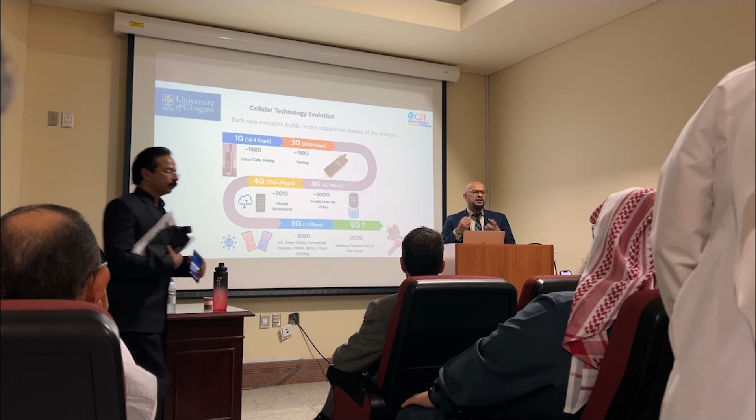I'm sure many of you were not born when 1G came. It was back in the 1980s. And every 10 years, we have a new generation of mobile communication coming, and each generation was better than the previous generation. And the real change happened when we had 5G, because we started talking about connecting an ecosystem. So up to 4G, we were talking only about mobile communication, mobile to mobile connection. But in 5G, we started talking about connecting everything by using IoT, your home appliances, so on and so forth.

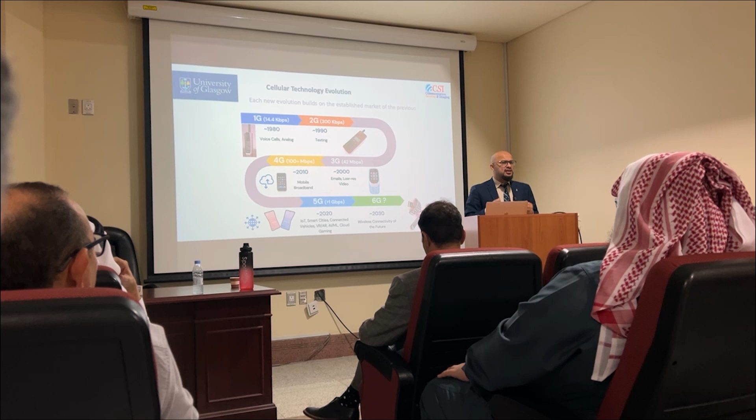And then 6G came. And the real feature for 6G is that up to 5G, you can do only communication by using the mobile generation. But with 6G, you can do both communication and sensing, which I will talk about in detail. But the question is, do we really need 6G? This is a big question, because I can watch movies, I can do anything by using even my 4G as well, and 5G can give me better speed. So I have to make the case that we really need 6G, and then I'll talk about technical aspects.

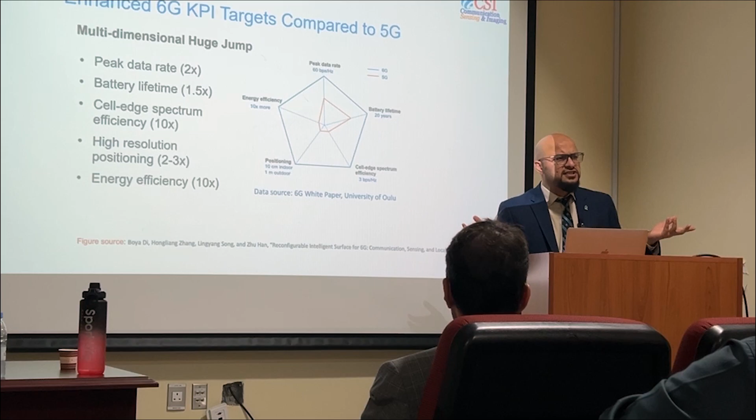So the number of mobile users is increasing day by day. Around 67% of the global population is using the internet, and an average user is spending 6 to 7 hours using mobile data, which is very big. So the demand is increasing. But this demand can be fulfilled by 5G as well, right? But I was in Mobile World Congress last year.

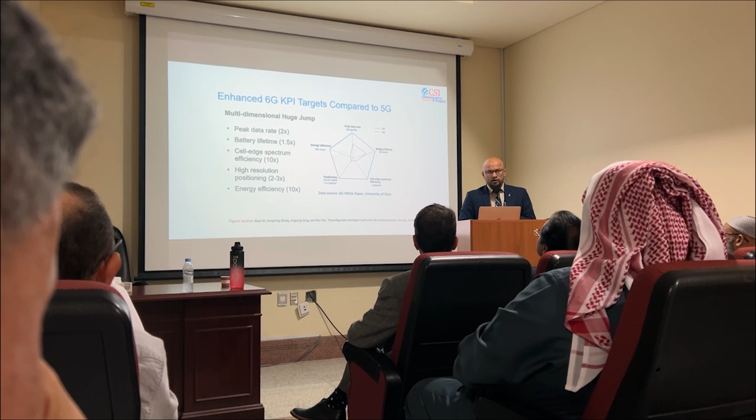So what happened is that for the first time in history since mobile technology's inception, the operators and vendors were not getting return on investment. Means they put money, so they want huge profit, but they were not getting it. Because the challenge is that, as I said, whatever 5G can do, 4G can do that as well, because there were not any use cases which explicitly need 5G, and money return comes from those use cases. So there was some flaw in designing mobile networks up to 5G. And what was the flaw?

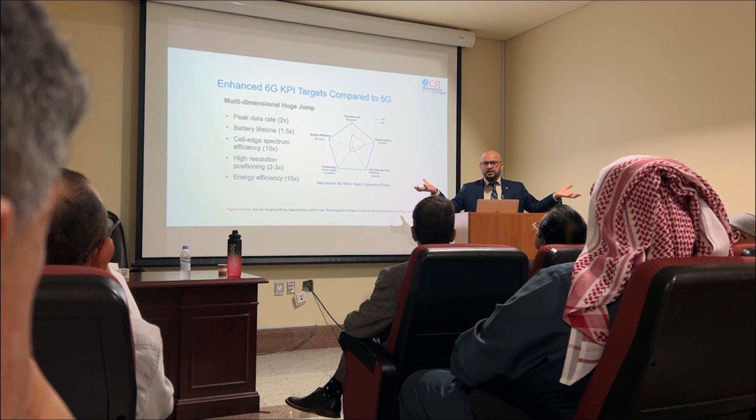That the researchers set up the KPIs, they make a network, and then there were no use cases outside, for example, for 5G. So we started thinking, let's go the other way around. Instead of setting KPIs for 6G, let's think of some use case first and then set up KPIs according to that. So we came up with a very interesting use case: how many senses do we humans have? Can somebody tell me?

Five. But people like Dr. Sami have six as well, but normal people have five senses. So up to now, we can transport 2.5 senses from point A to point B: hearing by using mobile phones, vision by doing video calls, and you have seen haptics by using robots, right? But we are unable to transport smell and taste.

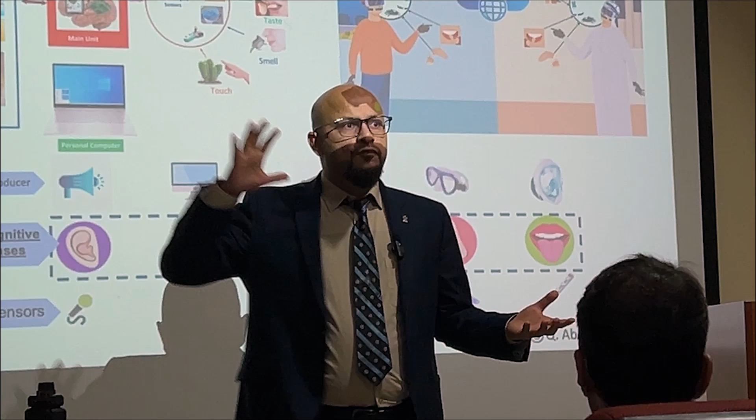So imagine if we teleport all five senses from point A to point B, then you can have a holograph with all five senses. For example, I can have a taste of any Saudi dish while sitting in Scotland, with the same aroma and the same environment. So that is teleportation of all five senses from point A to point B.

But this needs ultra low latency, ultra high throughput. For example, one square inch of hand needs around 10 gigabits per second of data, and imagine if it's a complete hand, how much data it needs. So this means that 5G cannot fulfill the stringent requirements for this use case. So we find something which needs 6G.

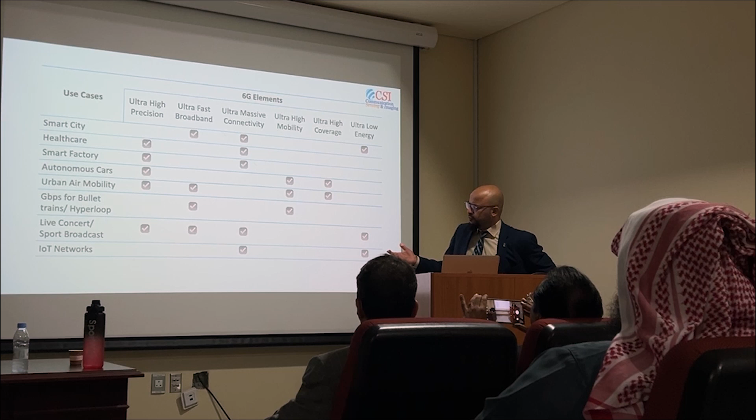But there are many other use cases for 6G available as well. And these are the elements of 6G which are under discussion. But one key feature for 6G is that it will be ubiquitous, that it can take decisions itself to enable various other use cases, including bullet trains and sports broadcast. FIFA is coming to KSA, so 6G will be very important to do this live broadcast.

So in our hub, we are working on technologies which can enable 6G. 6G will not be out until 2032, 2033, but we need to develop the technology. Now, use cases are set up, KPIs are set up, so work is being done on development. So we work on developing antennas. No wireless is possible without antennas. Antennas are the ears and eyes of any wireless communication system. We work on intelligent reflective surfaces, we work on quantum communication, but the focus of this talk will be on this.

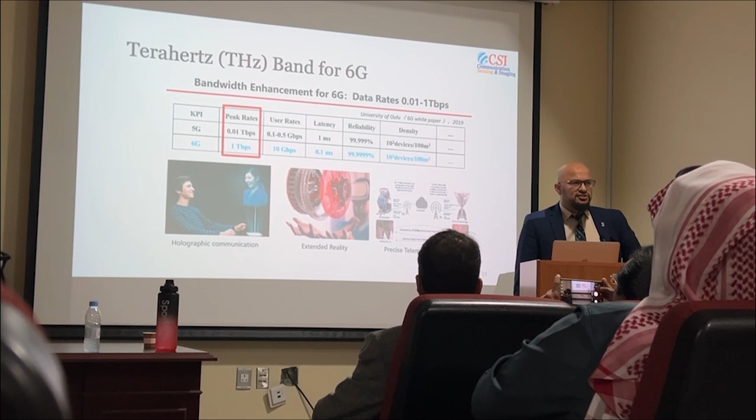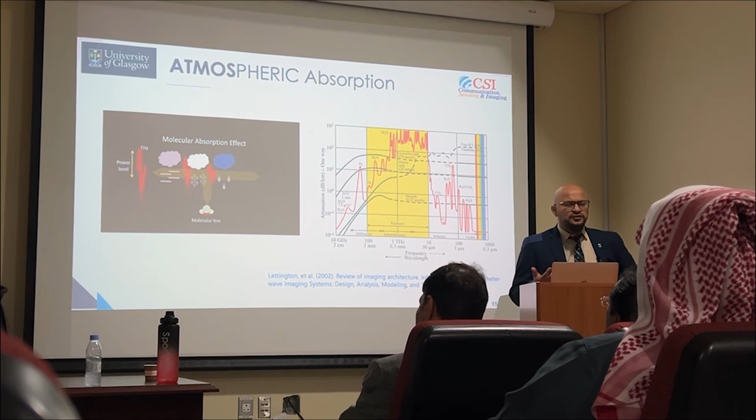So the prospective band to be used for 6G will be terahertz, because it can provide us features like a peak data rate up to 1 terabit per second and latency less than 0.1 millisecond. But it comes with challenges. Terahertz has challenges around atmospheric absorption, in that it is very sensitive to moisture content.

Second is skin depth. As you move higher in frequencies, what happens is that skin depth decreases. So it means we cannot use conventional materials for 6G. We need some new 2D materials which can enable 6G. So in our hub, we are trying to look at some novel 2D materials, which include graphene and carbon nanotubes.

Just listen to me, it's okay, don't worry about that. Yes, yes. No, I'll keep you entertained, you don't need slides. So, one sense then. You need two senses at least. But I can make it happen with one sense as well.

So 2D materials like graphene and carbon nanotubes, we are using those materials to make antennas. And they have a special phenomenon called the surface plasmon phenomenon. Focus here, forget about the projector. So they have the surface plasmon phenomenon, which can help to overcome the challenges posed by terahertz.

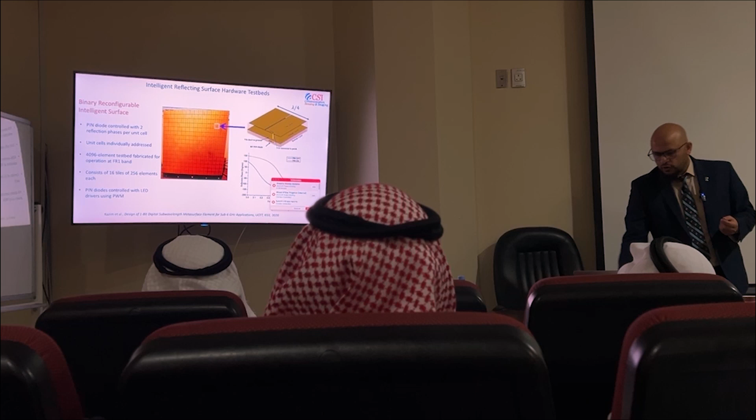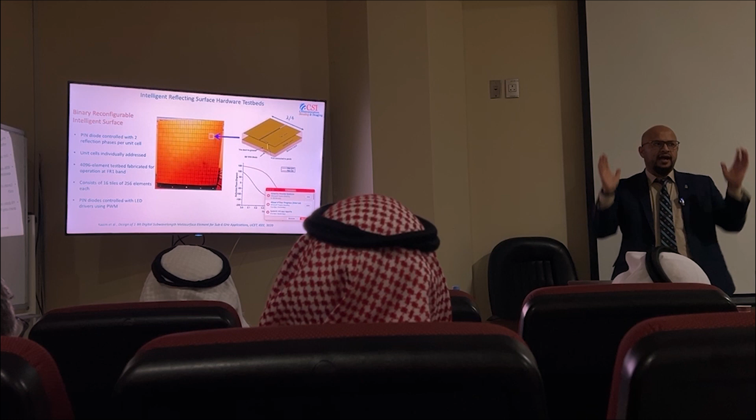So this is our first test bed. Basically, this is a 1-bit intelligent reflective surface. When I say 1 bit, it means that it can change the phase of the incoming wave by 180 degrees. So how did we make it? We made a meta cell, which is on the right top, and once it's designed, you replicate it to make a tile. The reason to make tiles is flexibility: you put tiles the way you like, like you put tiles on the floor. So you can make any shape, cascaded, parallel, hybrid, small, big, whatever you want.

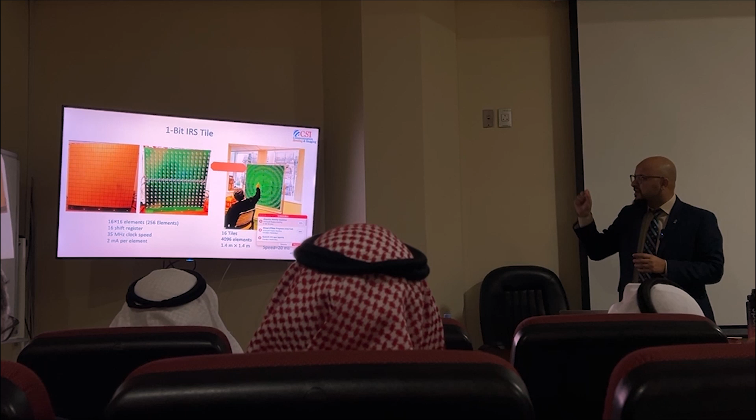And this is basically what this surface is doing. It is switching, changing the phase of the incoming signal. How is this achieved? By using a switching element, a PIN diode in this case. This first test bed has 4096 elements. It is one of the largest test beds available globally, and it can provide a very high gain. But one thing, students, you need to remember: the power consumption for this whole test bed was 15 watts, and I'll ask you later on.

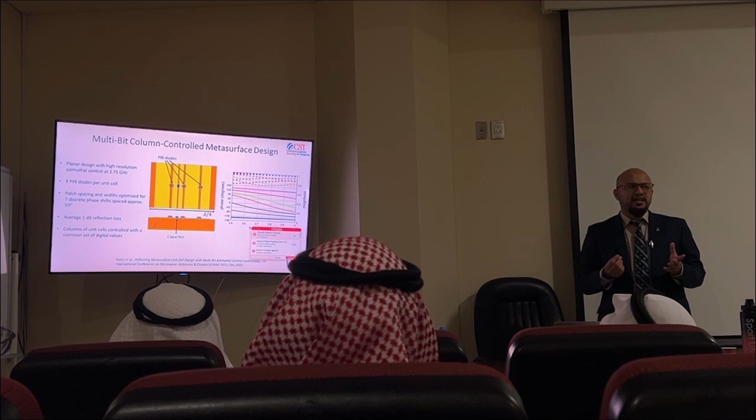The second test bed we made was a 3-bit metasurface or RIS design. By 3-bit I mean 2 raised to the power 3 states, in total 8 states. So you can change the phase of the incoming signal in 45-degree steps: 45, minus 45, 90, minus 90, and so on. The process was similar. We made a single meta cell, then a tile, and you can see in this figure we had 6 tiles.

One second, what is this? There was something coming. So we had 6 tiles. I think it should be fine.

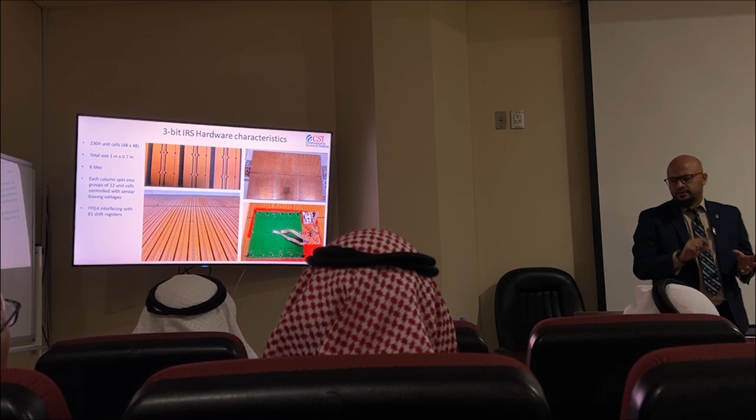We were controlling this architecture using an FPGA, because the FPGA is the brain which gives these configurations to turn on or turn off certain elements. This is the actual hardware we have developed. Now we want to test whether it serves the purpose, because one of the main benefits of these surfaces is to provide gain and reduce losses. So we took it to an anechoic chamber, a shielded environment with no external reflections.

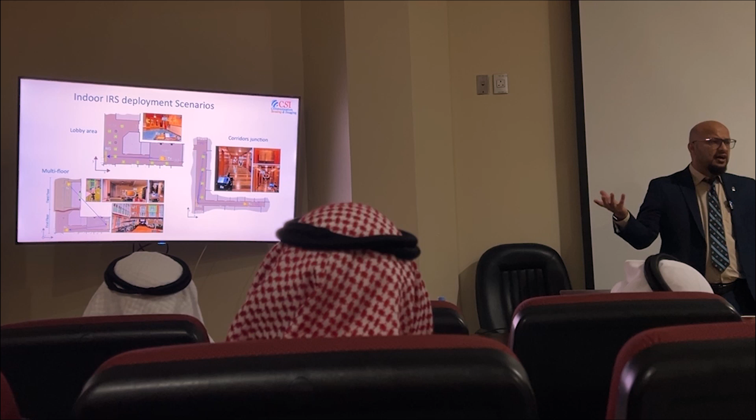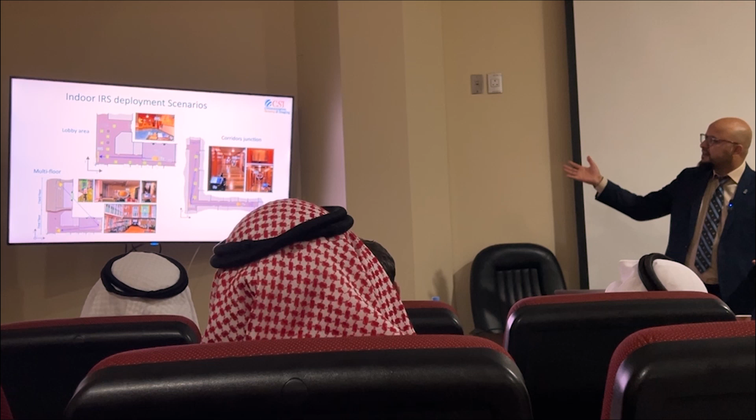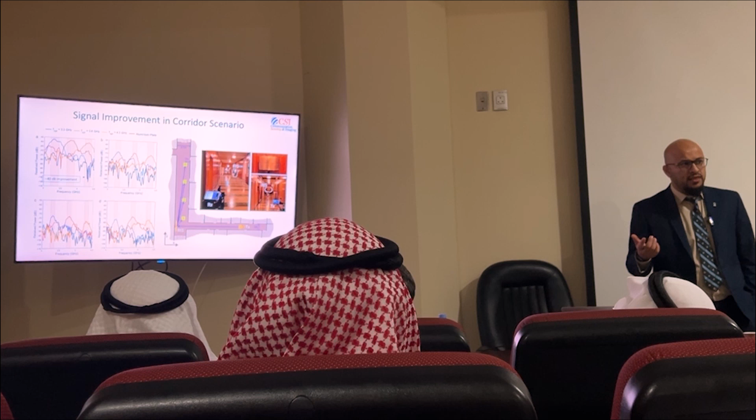We designed an experiment for various indoor environments, including lobby, multi-floor, and corridor junction, where the transmitter was placed at one location and the receiver at 4 different locations where they cannot see each other. Then we placed the RIS in the middle. Without the RIS, there would be no signal. The results were very encouraging, showing a gain of 20 dB on average. Improvement in power? Yes, improvement in received signal by 20 dB, which is very high.

We were working with British Telecom, one of the largest telecom operators, and we got super excited. We went to them: we did a breakthrough, look, it's working. And they asked us, what is the total power consumption? Can somebody tell me what it was? 15 watts. Yes. They said this is very high, because if you want to make a big system, 15 watts is very high, and replicating it costs them millions. So they did not want to invest a single dollar.

Due to switching the element. Heat is one thing, but power consumption is another thing. So they said to us, in cold weather you can use it for heating homes, yeah, but you have to provide the energy. So then as researchers, we got demotivated. What should we do? Because our years of service got wasted. But then as a researcher, you shouldn't get disappointed.

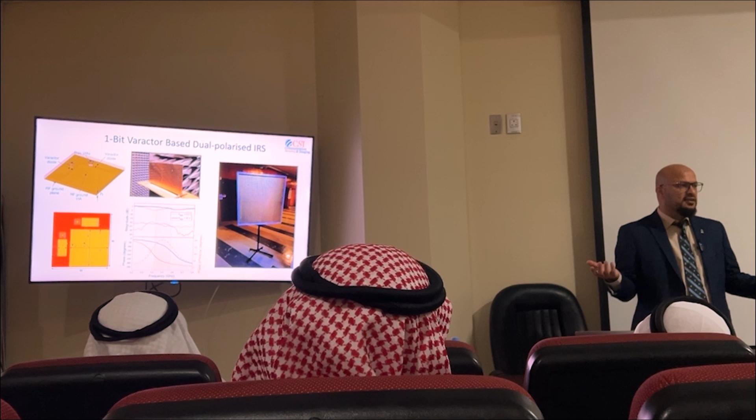So we started thinking again, and we came to know that the main power consumption was coming from those PIN diodes, the switching elements. I'm sure we all have studied varactor diodes. The beauty of varactor diodes is that they work in reverse bias, meaning they do not consume any power or current. So we made a new design where we use varactor diodes for switching instead of PIN diodes. Ultimately, power consumption reduced from watts to a few milliwatts.

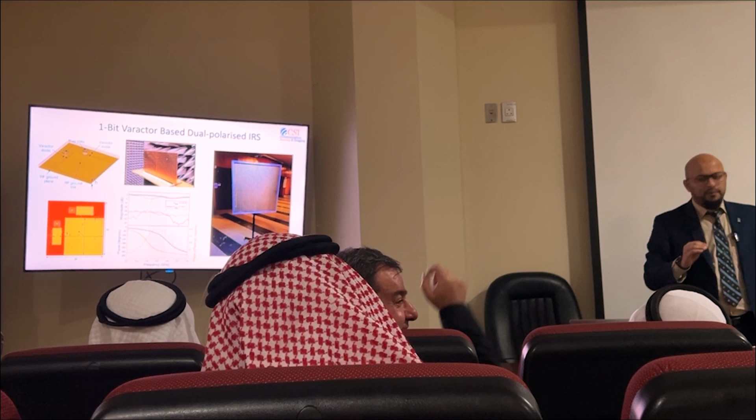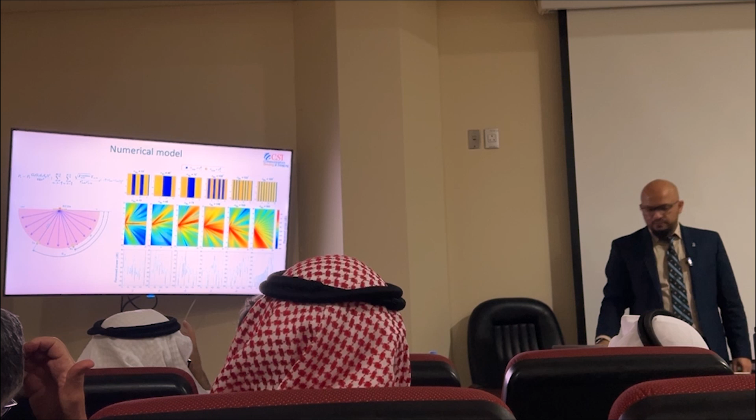So this was one thing we got by using varactor diodes, and the second thing was we were able to steer the beam, because with varactor diodes, if you change the voltage, you can change the capacitance. If you change that, you can switch the beams. So we showed that in addition to sending beams at a fixed angle, you can do beam sweeping or beamforming as well. We were able to do from 0 to 180 degrees, but this was in simulation. So we went to the University of Southern California to use their channel sounder to do actual measurements, and you can see there is close agreement between simulation and measurement.

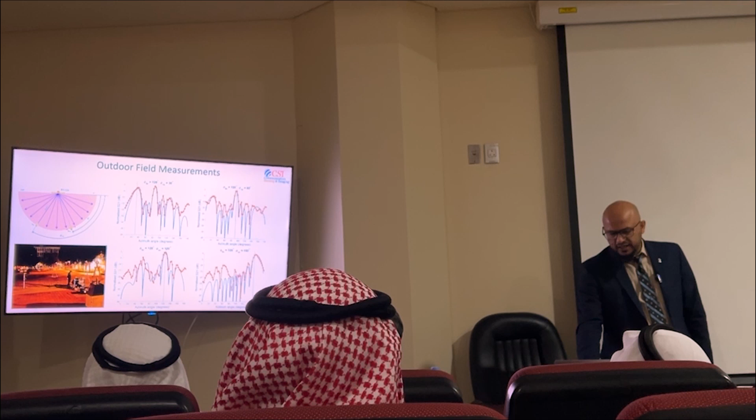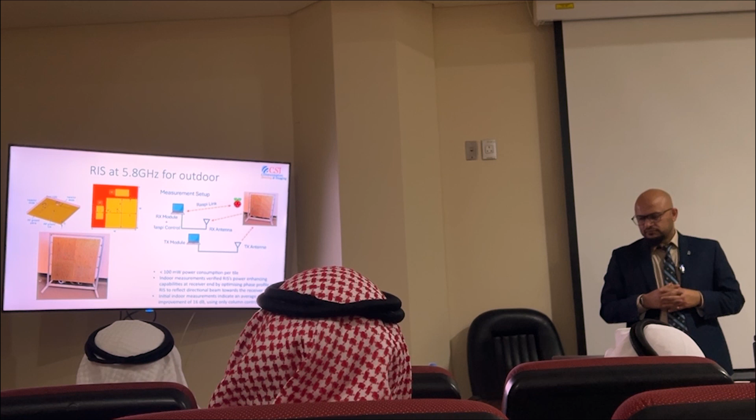Then we worked a lot with our defense department as well, where the idea was to make these reconfigurable surfaces at 5.8 gigahertz for outdoor environments, where we tried to make them flexible. This was a new design being developed at 5.8 gigahertz. I cannot tell more because it's related to defense.

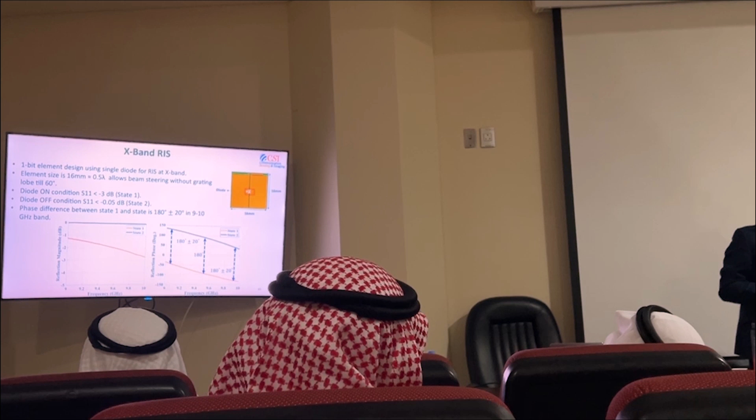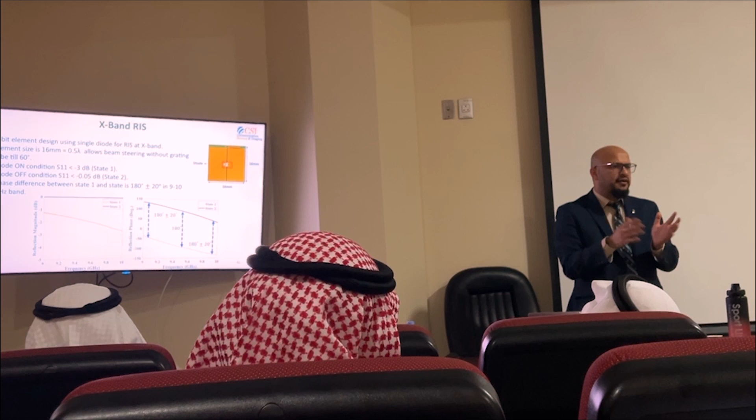And if you remember, I told you about a very unique feature of 6G, which is joint sensing and communication, doing both sensing and communication. So we designed these RIS surfaces at X band. X band is basically 8 to 12 gigahertz, which is used by some radars. So we were using those radars for sensing and for communication as well. But as I told you, if there is a non-line-of-sight scenario, you cannot do communication. So we needed to make these X band RIS, where the process was similar.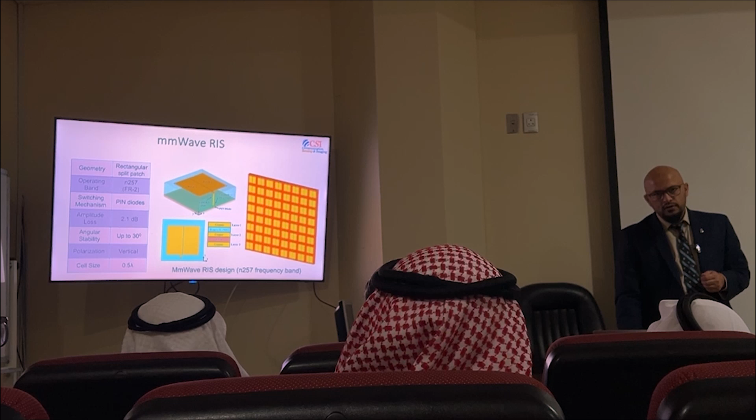So you sweep the phase shifts, and do you get feedback from the receiver that this is the best phase shift? So what we do is we have a PSO algorithm running which scans the beam continuously and looks at the maximum SNR. Wherever we are getting maximum SNR for the receiver, we transmit the signal in that direction. No, there is no feedback from the receiver. It is scanning by finding a location where we have maximum SNR going out. So we are not getting that.

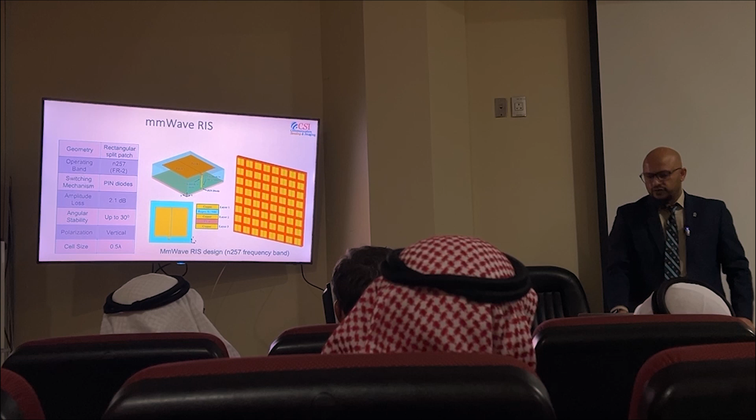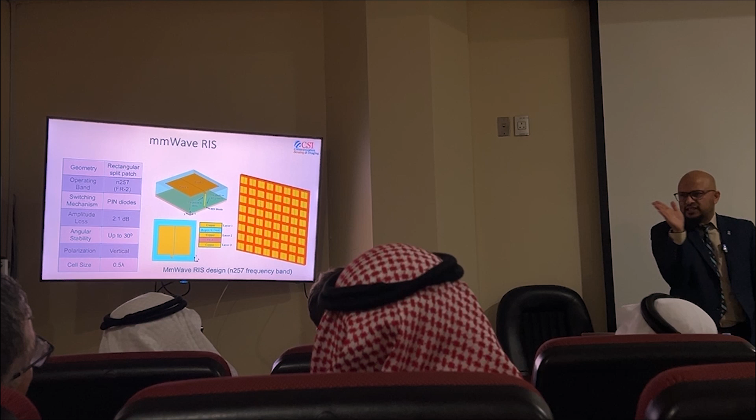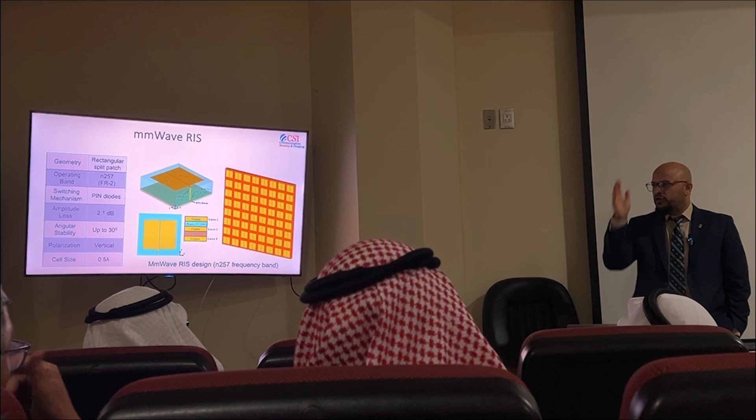But then how do you decide where to focus the beam? Yeah, this is basically the PSO algorithm, which is continuously scanning where we have less noise, more signal-to-noise ratio. In that case, we conclude that in this direction we can get maximum SNR, meaning received power will be maximum. So we focus on that direction. But shouldn't you do it the other way around? Where is the weak spot? I should focus my beam there.

Towards the receiver side, right? Yes. So no, this is basically scanning where we have less noise. Of course, we're going to send to the receiver where it is required. For example, you three are receivers, right? And one of you needs a signal, the others do not, right? So based on that, we have a closed loop going on where we focus the beam towards that demanding user.

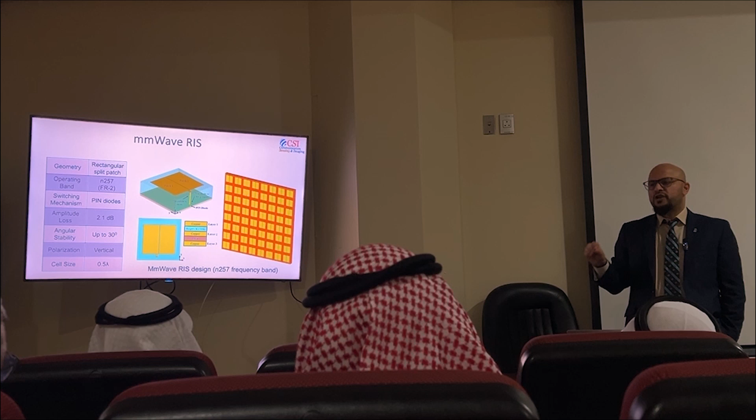And I got your point about the weak spot as well. It's not compulsory that it needs to be a weak signal location where you send the signal, but that is a good option. It means that you have feedback from the users telling which user needs it. This is a long-term goal. But currently we have fixed spots, because we are making an AI algorithm to do it.

But the answer is currently we don't have it. But this is the ultimate goal. Then you can adapt the power to serve all users. Sorry? You can adapt the power? Yes, different beams to serve multiple users. Yes, we can do that. Same level, yes, we can do.

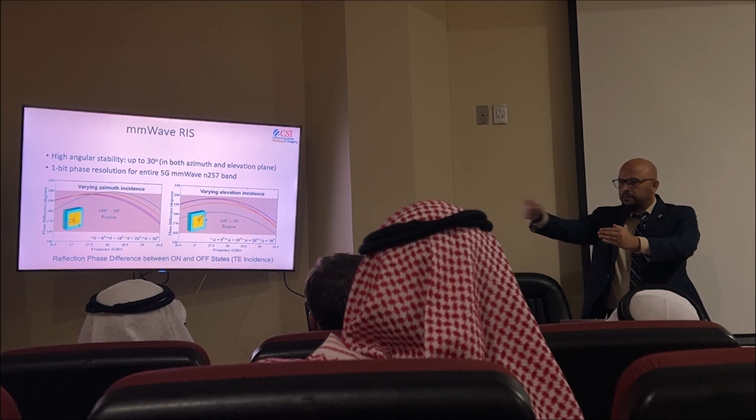Do you create multiple beams here? No, it was beamforming. So at one time we are doing beam scanning actually. But at once you will focus on one beam, no multiple beams here. No. So currently the goal is one user will get the maximum signal in the main beam width, but others have some beams as well, but that is low power.

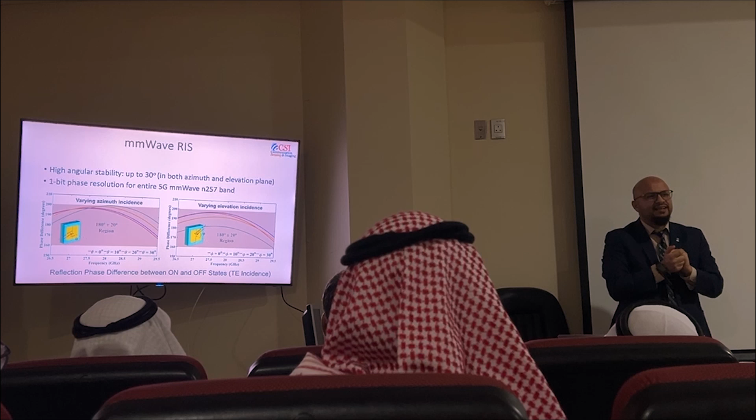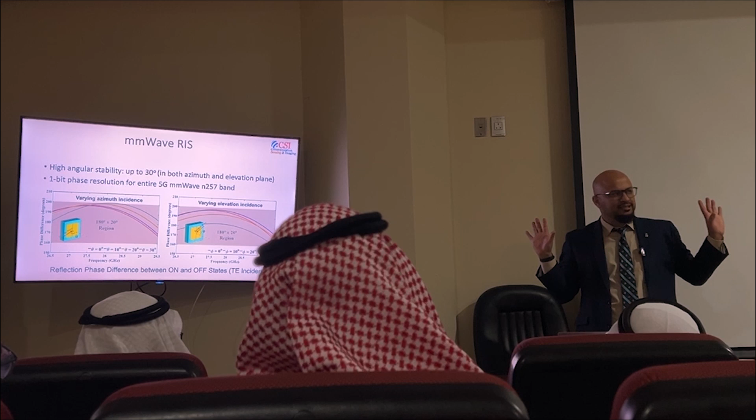Why not create different beams to serve a number of users? Yes, absolutely. That is the ultimate goal, but it's work in progress. So the ultimate goal for RIS is that I place it on a wall, it uses its own brain by looking at the environment, getting feedback from both transmitter and receiver to make multiple beams, giving signal to whoever wants it at whatever power level they want. But this is a big goal, which is still not done.

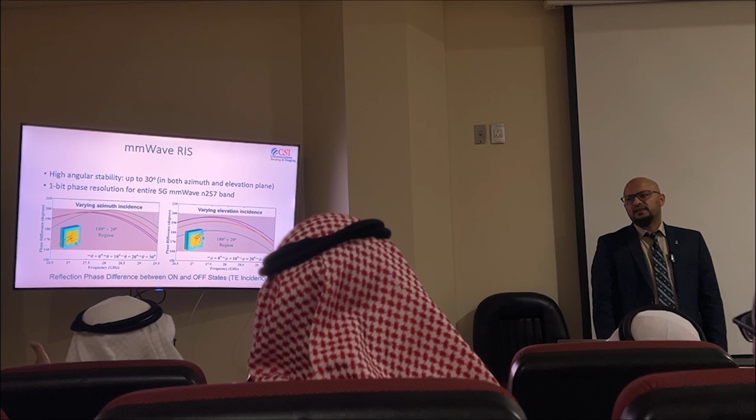But your current limitation is from the number of bits of switching. Yes. If you want to increase that, then you can have it. Absolutely, because it's a trade-off. When you have more bits or quantization, you need more PIN diodes, more switching elements, more complexity. So it's a trade-off. Sorry, you were asking something?

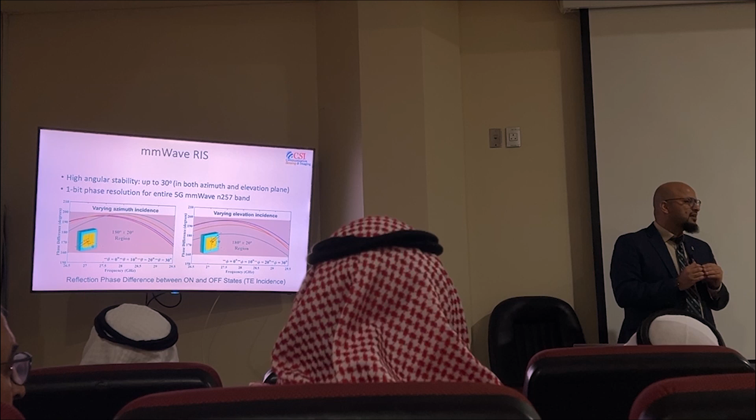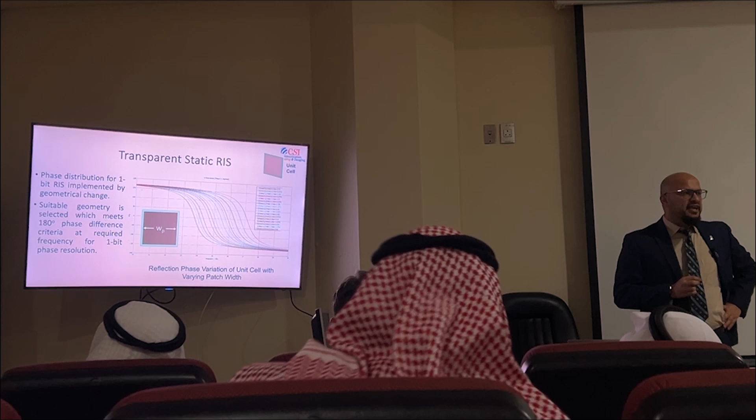Let's finish. Okay. So the last RIS we made was a static transparent RIS. The idea is that you can place a sticker on a window, the window remains transparent, and you can get all the signals coming inside the environment. We were using silver nanowires, and we can get beam switching from 10 to 40 degrees.

And this is my latest project, which just started, about RTDs. When you go to higher frequencies, losses are higher. So we switched to active RIS, working with colleagues on RTD and TMO material. The idea is that we put these amplifiers on unit cells so that we can amplify the signal as well. This was just funded 2 months ago, and we are working at 100 gigahertz to make these RTD and TMO enabled RIS. I'll skip this optical RIS.

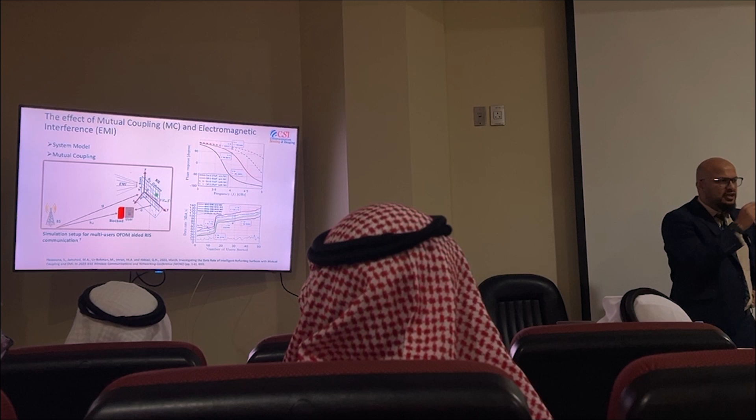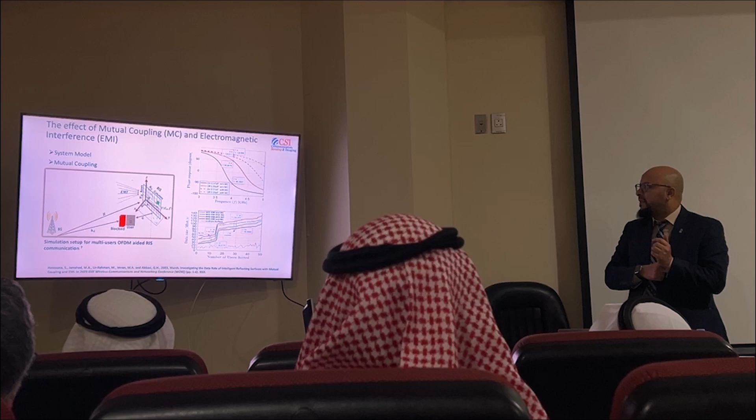I know there are some signal processing people as well. So we are not only developing these surfaces, but also looking at fundamental issues. One challenge is mutual coupling between elements and EMI. In the top figure, the dark lines are when we consider our switches without any mutual coupling. But when we consider mutual coupling, the capacitance changes, and you can see that the peak data rate drops significantly. People working on this are ignoring these fundamental challenges.

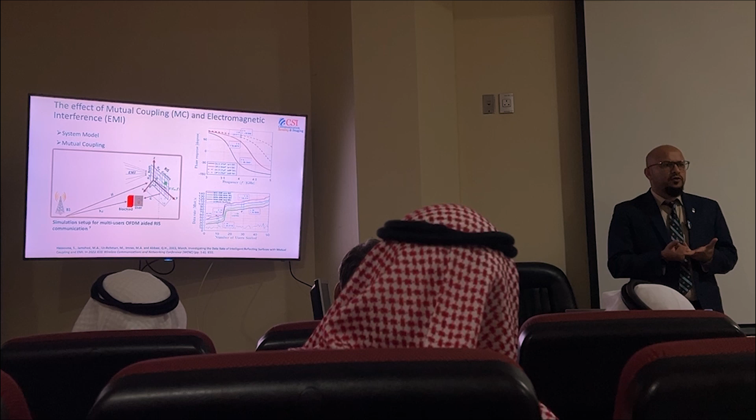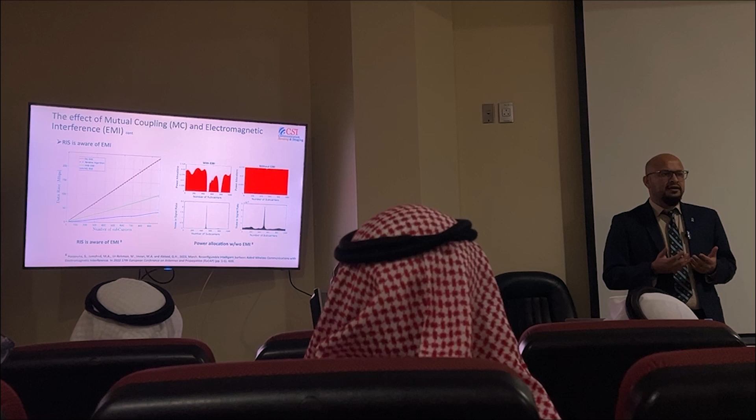So we have developed an iterative algorithm where, as the Professor was saying, we distribute the power as per the user requirement so that we can reduce EMI and mutual coupling issues. And you can see in the slide that our iterative algorithm is very close to considering it with EMI. This demo will show you what our RIS is doing. This is a bit of an old video.

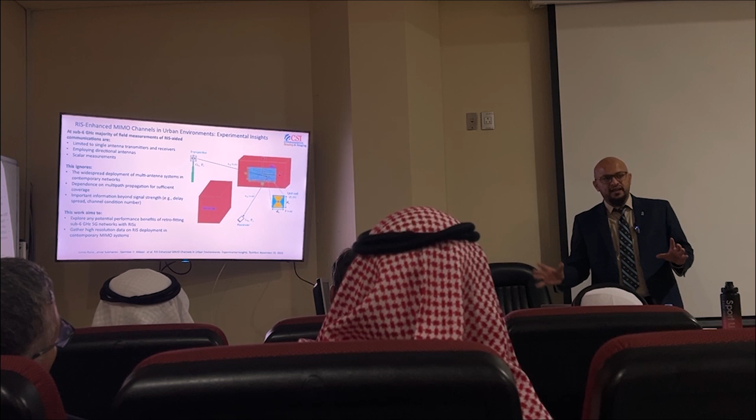This is 1 bit. And then I was delivering a talk in one of the conferences and somebody said to me, oh, your RIS gain you showed, it is by using horn antennas, directional antennas, and it was a very controlled experiment, so it was very obvious that you will get gain. So as researchers we got demotivated, but we didn't give up. So we went back and we did world first outdoor trials with a commercial network by using this RIS technology.

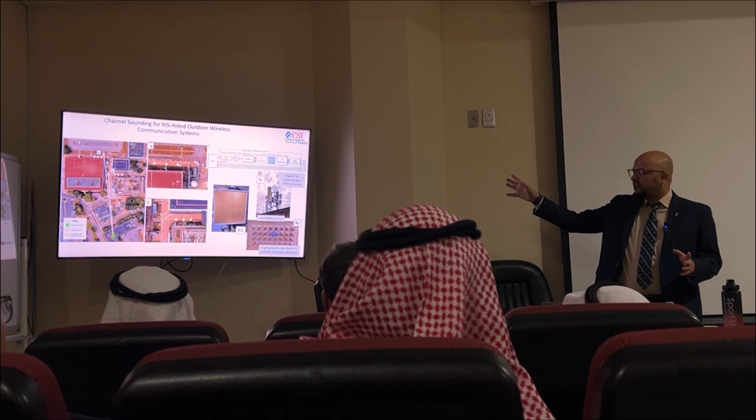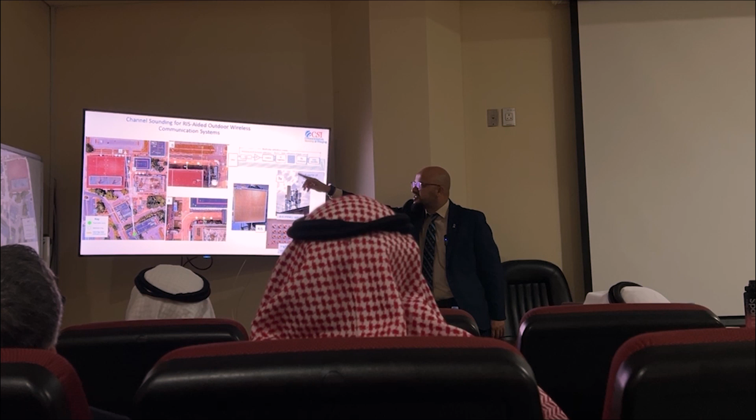So this is the mast of British Telecom, the mast which you all have seen, and these were the antennas they use at receiver side. So we designed an experiment. This green circle is a transmitter, and then we defined two zones, A and B, and we placed our RIS there with receivers at different locations to see if this will work in a commercial network or not. Needless to say it took us months to plan these experiments. But what is important are results.

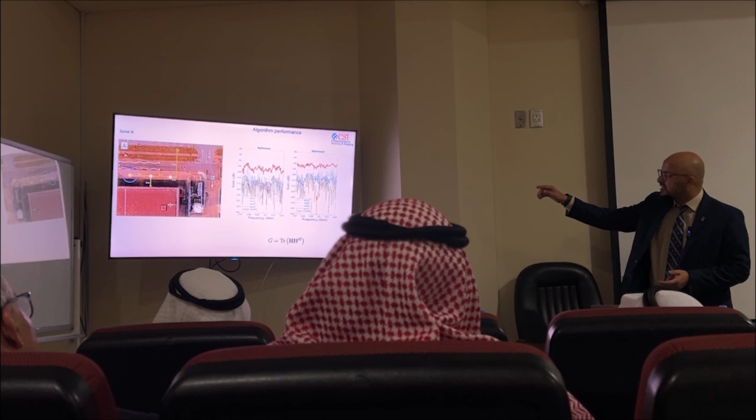So this is zone A, where the left hand side is when there was no RIS, the power levels were low, but the right one is optimized, it means we have got a gain. So for 3 different locations, 1, 2 and 3, we were getting an average gain from 5 to 15 dB, and at 33.6 dBm there was 50% capacity increase, which proved our point that these RIS surfaces work very well in an outdoor commercial network as well, with a gain of around 10 to 15 dB. So this was all about RIS in communication.

But the second application we work on is sensing. Currently, we go to the doctor, they ask us about our health parameters and then they prescribe something. This is called doctor based healthcare. But we have mobile phones, we have smart watches, so we want to control our health ourselves. This is called patient centric healthcare. The idea is that we move from doctor centric healthcare to patient centric healthcare by having smart homes.

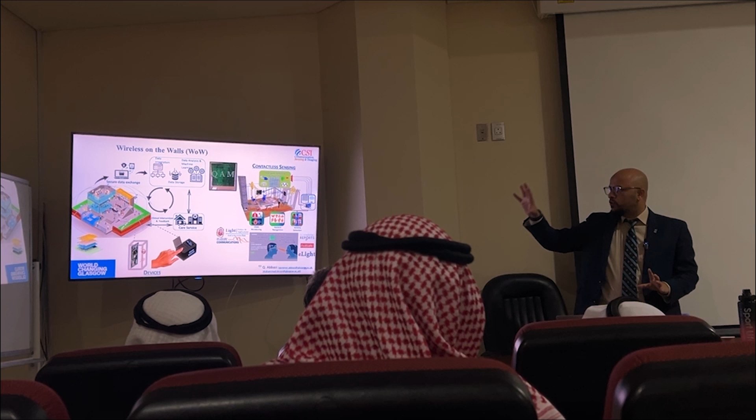So in future I'm going to have a home which has various kinds of sensors in it: wearable sensors, environmental sensors, nanoscale sensors. These sensors will collect information together, send it to the cloud, where we will apply machine learning and deep learning to the data, and then we can take proactive decisions, meaning decisions before something happens. So this is the vision for future healthcare. I myself work on wearable sensors and RFID technology as well, but I'll focus on a special kind of sensing called contactless sensing.

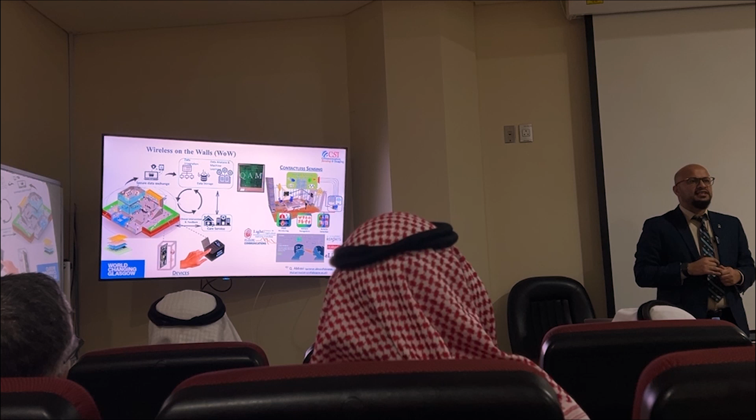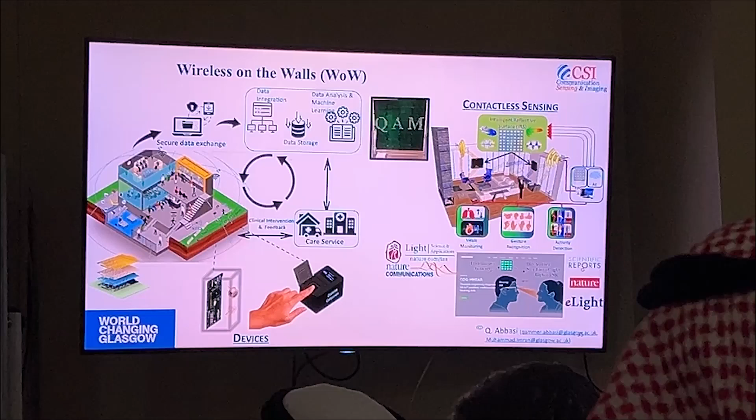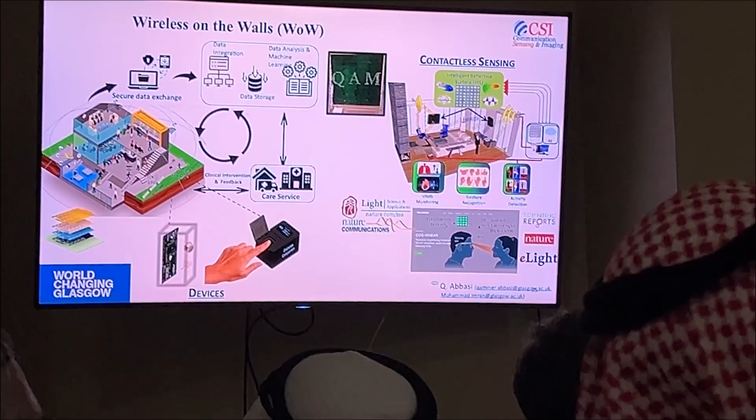The idea is that we have radio frequency signals around us, right? We have Wi-Fi, mobile signals. So can we use those signals to monitor people? Yes. We were using those signals for the last 10 years to monitor people, but one challenge with contactless sensing is that the user needs to be in between transmitter and receiver, number one. The second challenge was resolution, because RF waves are ambient. The third problem was if someone stood up and went out, you cannot track the target. So there were certain limitations with current contactless sensing.

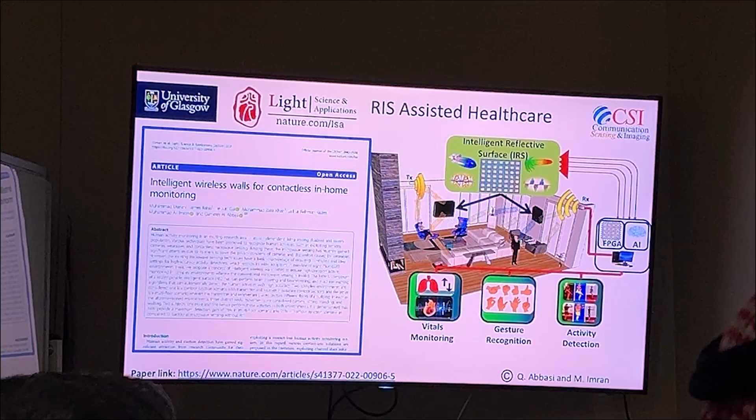So what we did was we used these reconfigurable intelligent surfaces and published in Nature, where the idea was that we can control electromagnetic waves to focus on the user. So ultimately we can increase resolution, we can localize the target, and we can have this sensing in non-line of sight scenarios as well. The details are in the paper.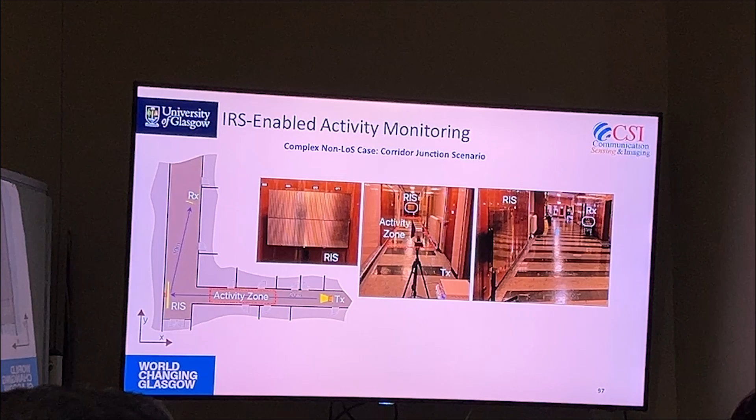So we did these world first experiments to prove that this works by designing an experiment where transmitter and receiver were unable to see each other, and the user was performing some activities near the transmitter in various scenarios. The results were interesting. When the surface was off, we could not see any activity. But when we turned on our surfaces, we were able to detect these activities with 100% accuracy. This was 3 years ago, but we have progressed a lot. Then the second thing, again, we published this work in Nature.

This is very interesting. You have seen in your families or somewhere people who have hearing issues. So they wear hearing aid devices, but those devices have a phenomenon called the cocktail effect. The cocktail effect is that those hearing devices' noise levels are trained for a certain environment.

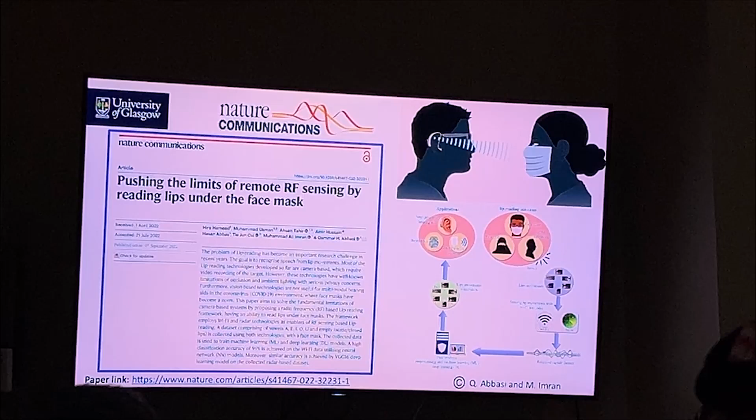See, this is a very calm environment, that will work, but if you go outside, it might not work when it's noisy, because those noise levels are not adjusted accordingly. And they hate to wear these devices, because if you ask them, it's a very painful noise, which is called the cocktail effect. So what we thought, let's make an intelligent hearing aid device.

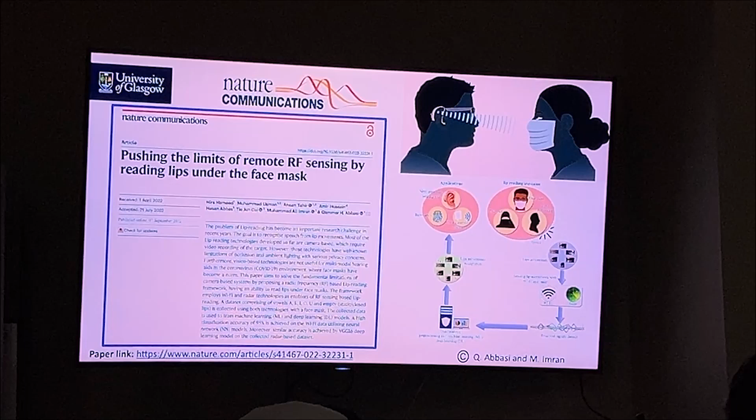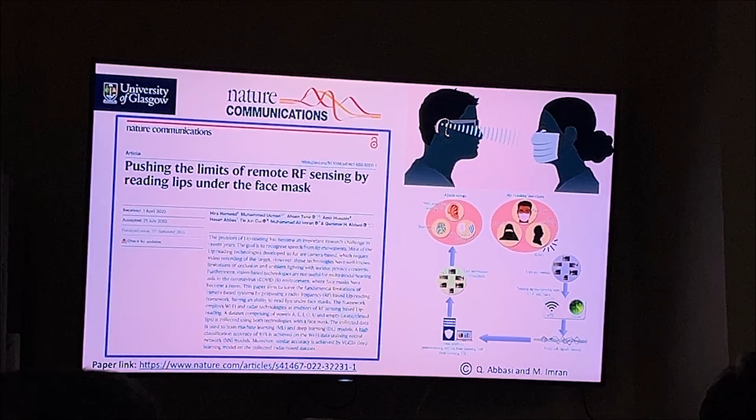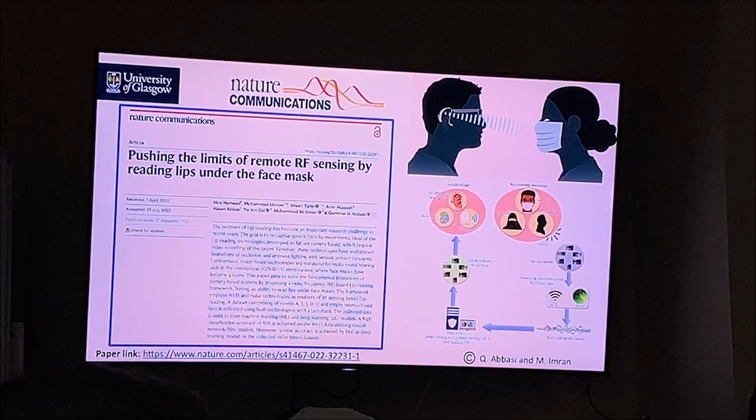So we humans have brains, right? Your brain is interpreting information, what I'm saying, not only based on my audio. It's listening to my audio, looking at my body language, looking at slides, combining all that information and converting it to useful information. So we thought the same concept, that can we make hearing aid devices intelligent, where we take multimodal information, audio, lip movement, facial expressions, combine all those so that the device can adjust the noise threshold level. Ultimately, the cocktail effect will be reduced.

So what we did, during the pandemic, a challenge came that everyone was wearing a mask. So there was a Google technology which was reading the lip movement through camera, but if someone is wearing a mask, you cannot read the lip movement. But RF waves can penetrate, so we used this to read the lip movement for the first time. Ultimately, we proved that we can read somebody's sentences, what they are saying, by using these radio waves with an accuracy of more than 80%.

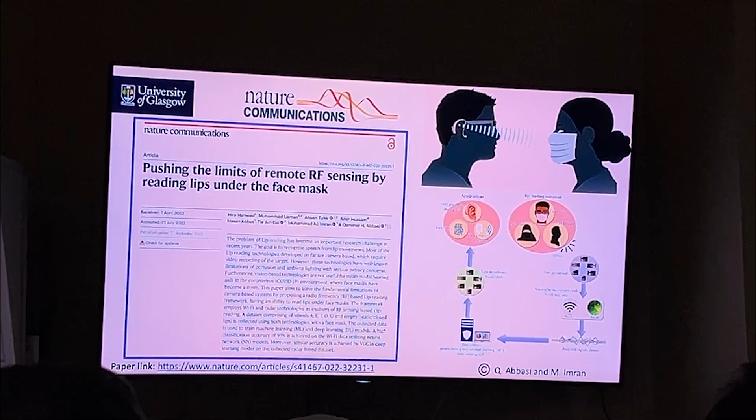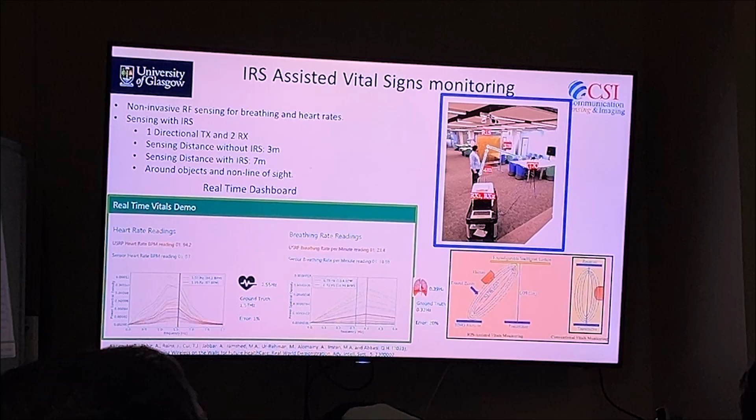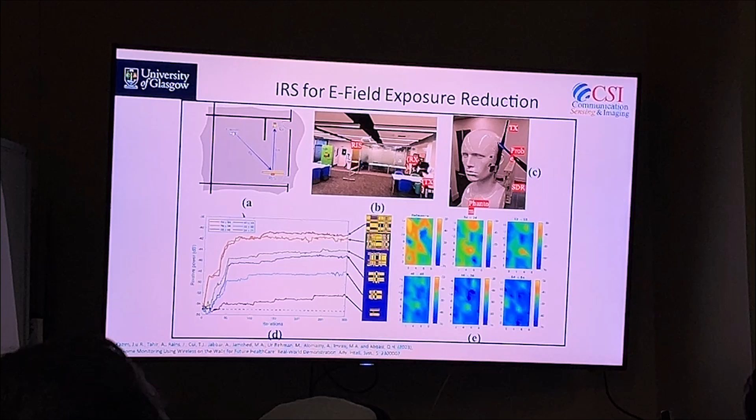And then we have progressed so much in it, where we are using some kind of RIS surfaces in a mask to focus the beam. And then these RIS surfaces were being used to monitor people's heart rate and breathing rate as well for non-line of sight scenarios, where we compared our work with off-the-shelf breathing and heart rate sensors, where the error was only 1%. And then this is brain-computer communication.

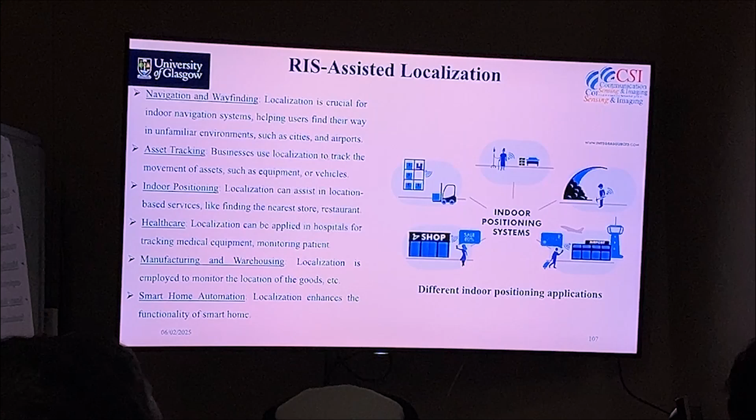The last bit of my presentation is about localization. So we talked about RIS for communication, RIS for sensing, and the next thing is localization. We all know that localization has so many benefits, including navigation and wayfinding, asset tracking. You all know that GPS does not work inside, right? So we showed that if we put these surfaces on a window glass or somewhere, we can do indoor localization with very high accuracy. So we published this again in Nature.

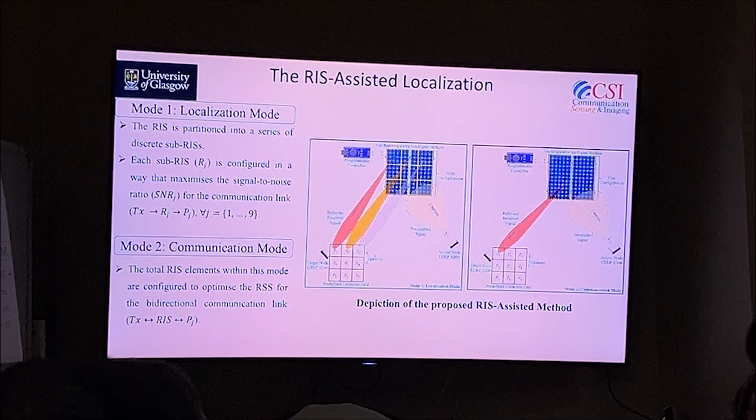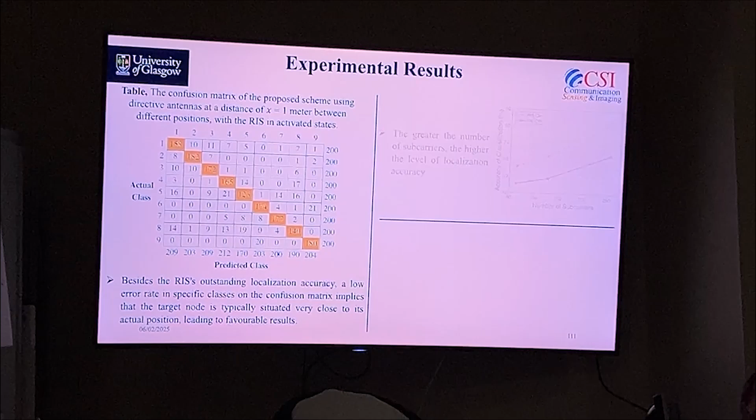So we developed a controlled experiment where users were placed at 9 different locations with a spacing of 1 meter. I'll skip the details of the experiment, but the key was that we were able to detect the location with an accuracy of more than 84%, which is again work in progress. And then we were using this RIS for V2X security and so on.

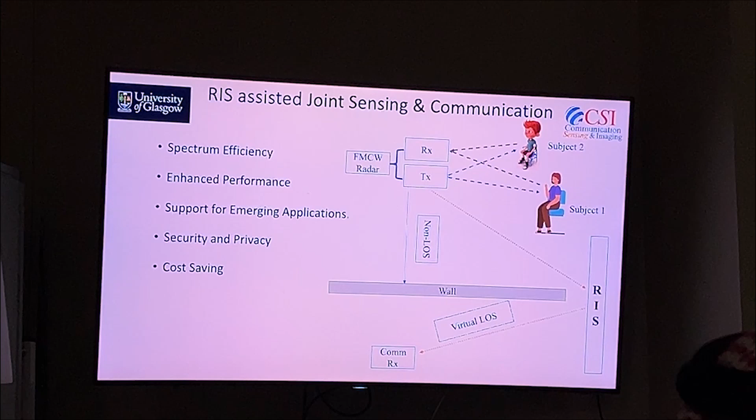But I'll close my talk with this demo, which is the key feature for 6G, which is joint sensing and communication, how you can do both sensing and communication using the same frequency, the same system. And the benefits are so many, because it will provide spectrum efficiency, cost saving, security and privacy. So how we demonstrated it: we had 2 users, we measured their vitals, which is sensing, and we also used the same frequency to transmit that data, which was communication. And this was the world's first demonstration to prove that we can do joint sensing and communication.

I was thinking what to put in the summary, but the conclusion is the future is here, and we all need to work together to make this future happen.